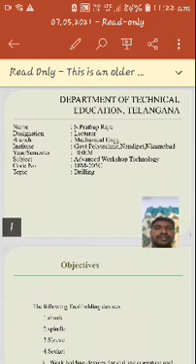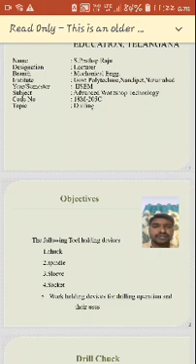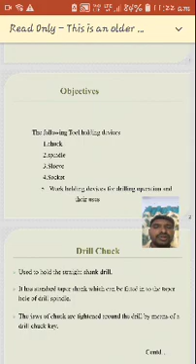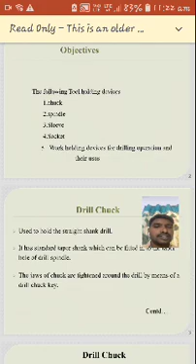Our subject is Advanced Workshop Technology. Today we are going to discuss the topic of drilling. Yesterday we discussed the various types of drilling machines. Today we will discuss the tool holding devices as well as work holding devices, namely chuck, spindle, sleeve, socket, and the work holding devices and other drilling operations and their uses.

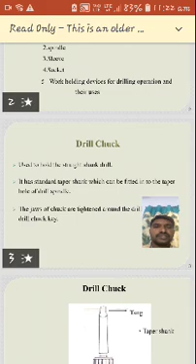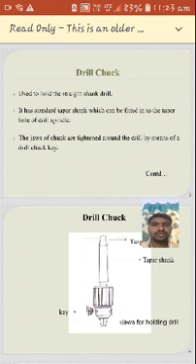First we will see the tool holding devices one by one. The first one is a drill chuck. It is used to hold the straight shank drill. It has a standard taper shank which can be fitted into a taper hole of the drill spindle.

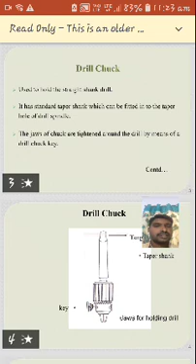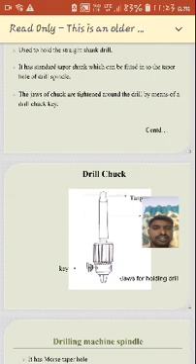In the figure we are able to see the drill chuck. The jaws of the chuck are tightened around the drill by means of a drill chuck key. Here we see the key; by using it we can tighten the drill, opening and closing it. The jaws hold the tool in the drill chuck.

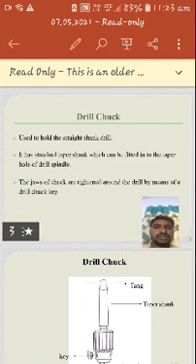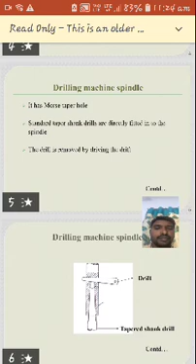One of the major tools to hold the tool is the drill chuck. The next type is the drilling machine spindle. It has a Morse taper, so the standard taper shank drills are directly fitted into the spindle.

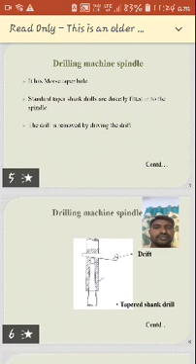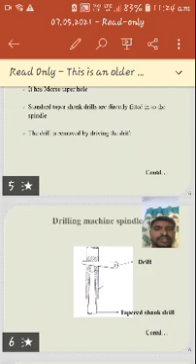The drill is removed by driving the drift. If you want to remove the drill, just drive the drift from one side and it will open the drill, so it will be dropped down. Here the machine drill spindle can be seen in the figure.

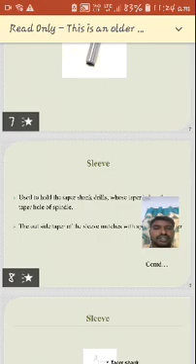The next part is the sleeve. What is the purpose of the sleeve? It is also one of the tool holding devices, used to hold taper shank drills.

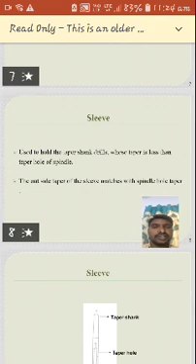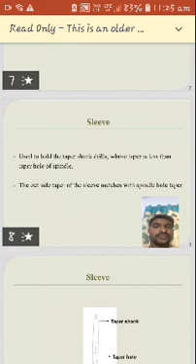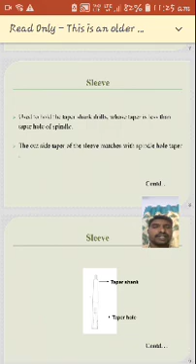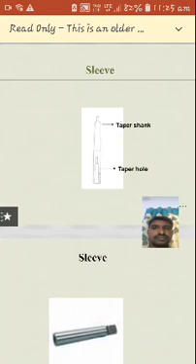The drills of the shank are mainly two types: one is a parallel shank, another is a taper shank. In order to hold the taper shank drills, we use sleeves, whose taper is less than the taper hole of the spindle. The outside taper of the sleeve matches with the spindle hole taper, and once it matches, we can use the sleeve. Here we are able to see the sleeve figure in the slide.

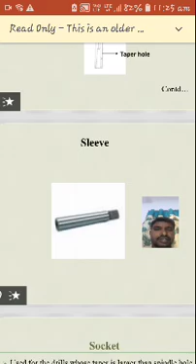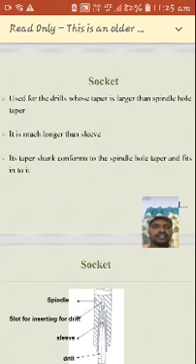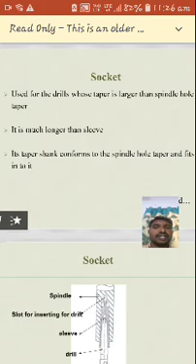Next, after the sleeve, is the socket. Sockets are used for a drill whose taper is larger than the spindle hole taper. It is quite the reverse of the sleeve, opposite to it, and is much longer than the sleeve. Its taper shank conforms to the spindle hole taper and fits into it.

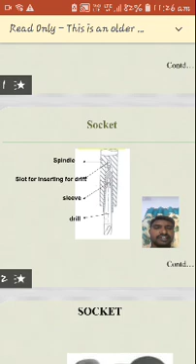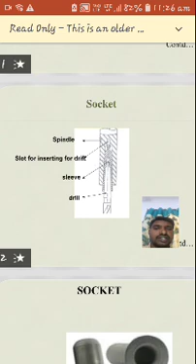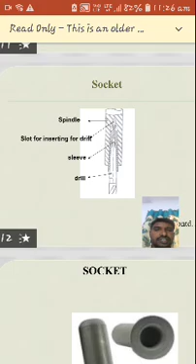Here we will see the figure of the socket, which has various parts. The drill is inserted into the socket, with the sleeve and spindle also present. We use the drift, inserting it into a slot. If you want to remove the drill, you drive the drift, and the drill will automatically drop down. Here we see the socket figures.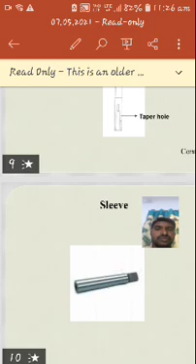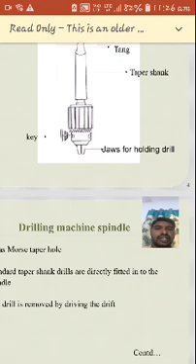So those are all the tool holding devices, namely drill chuck, spindle, sleeve and sockets. Now we move to the next topic, that is work holding devices.

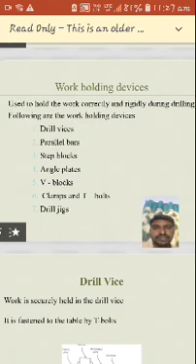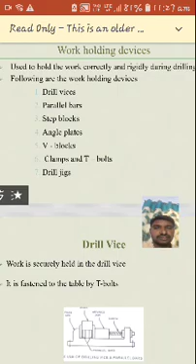The purpose of a work holding device is to hold the workpiece stationary, correctly and rigidly during drilling. The following are the work holding devices used: the first one is a drill vise, second is parallel bars, third is step block, fourth is angle plate, fifth is V-block, sixth is clamps and T-bolts, and seventh is drill jigs. These are all the various work holding devices, which we will see one by one.

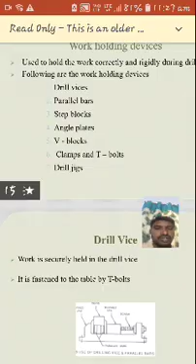Here we are able to see all the work holding devices in one place.

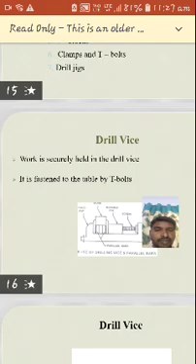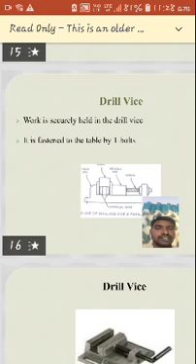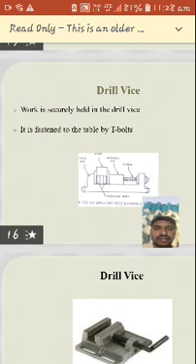See here, this is a parallel bar. The first one is the drill vise. The work is securely held in the drill vise and fastened to the table by T-bolts. So that is a drill vise. The two jaws are there, and in between the jaws the work will be placed, held stationary.

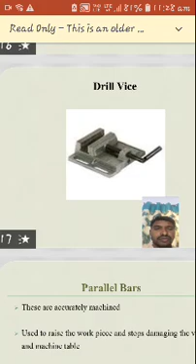In the figure we can see one is a fixed jaw, the other is a movable jaw. The movable jaw is rotated by a handle, so conveniently we can set different sizes of workpieces.

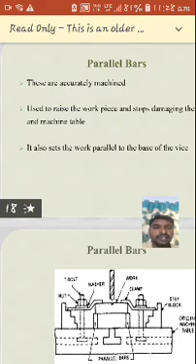Next one is parallel bars. These are accurately machined and used to raise the workpiece and stop damaging the vise and machine table. The main purpose of these parallel bars is to raise the workpiece.

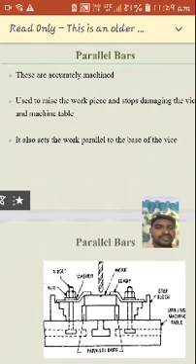Suppose small workpieces are there, the height will be low, so it goes to the bottom, and the drilling machine cannot make the hole on the workpiece. To make it convenient, the workpiece needs to be moved upside, which we achieve by using a parallel bar.

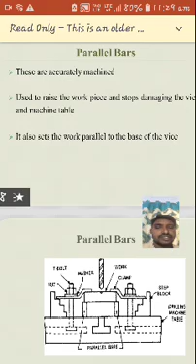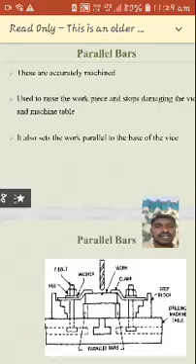So at the bottom end we can place the parallel bars. The parallel bars are accurately machined, and it also sets the work parallel to the base of the vise. Due to that, we prevent damage to the vise. That is the main concept of the parallel bars, as we can see in the figure above.

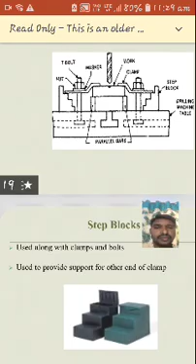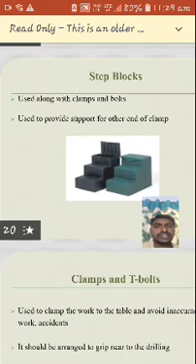The next one is the step block. It is used along with the clamps and bolts, to provide support for the other end of the clamps. In the above figure we can also see the step blocks - one end of the clamp will be placed on the step block.

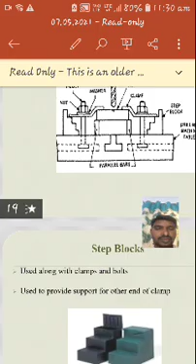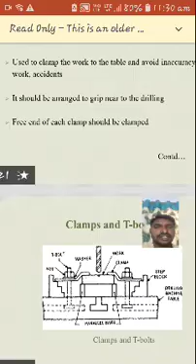Next, clamps and T-bolts. These are used to clamp the work to the table and avoid inaccuracy or accidents. It should be arranged to grip near the drilling area, and the free end of each clamp should be clamped. That is about the clamps and T-bolts.

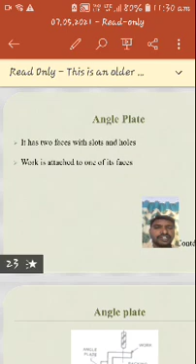Then the last one is the angle plate. It has two faces with slots and holes. The work is attached to one of its faces, as we can see in the figure.

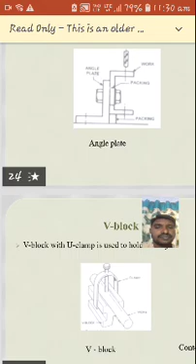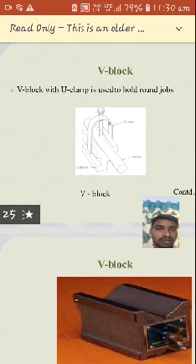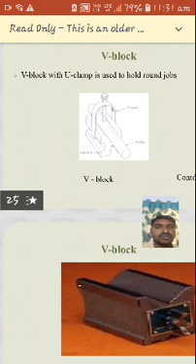Next one is V blocks. V blocks and U clamps are used to hold round jobs. If you want to make drills on round jobs, the parallel bars and drill vise are not secure enough to hold it stationary. So at that time we use the V blocks to hold the workpiece stationary, with round jobs held in U clamps.

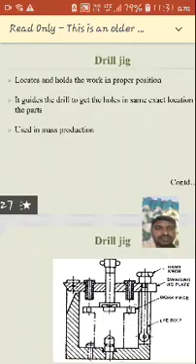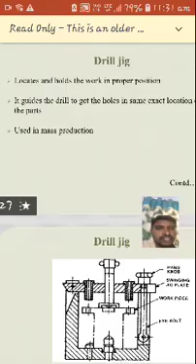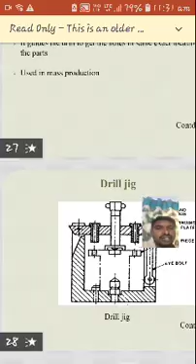Then a drill jig. It locates and holds the work in a proper position, and guides the drills to get the hole in the same exact location on all the parts. Generally these drill jigs are used in mass production because of the cost involved. This is a drill jig.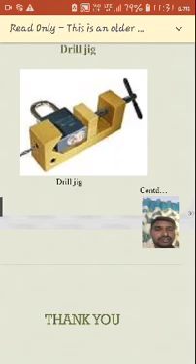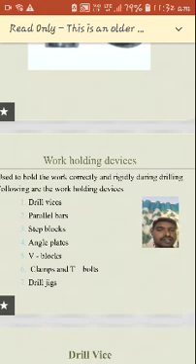So these are all the work holding devices. Let's see what they are: drill vise, parallel bars, step blocks, angle plates, V blocks, clamps and T-bolts, and drill jigs. These are all the various work holding devices used in drilling machines.

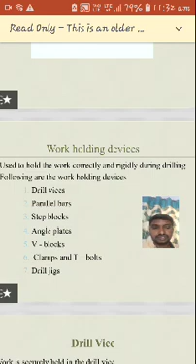So these were today's topics, tool holding devices and work holding devices. Tomorrow we will discuss the drilling operations. Thank you.